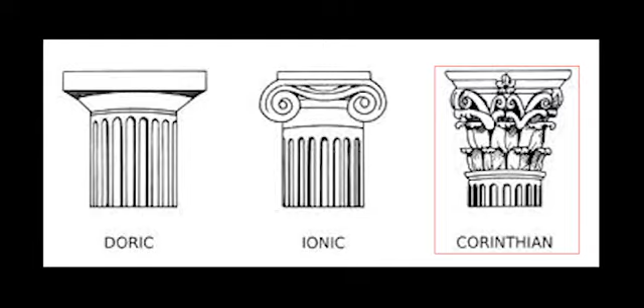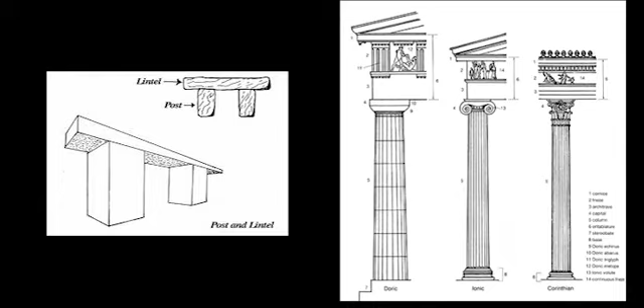You can see that the columns and facades of the buildings were inspired by the post and lintel system developed in the prehistoric time. The Parthenon, designed by Ictinos and Callicrates, was a very influential design during the Greek design period. The Parthenon in Athens stands on a raised outcrop called the Acropolis in Athens. Phidias was responsible for the sculptural elements of the building.

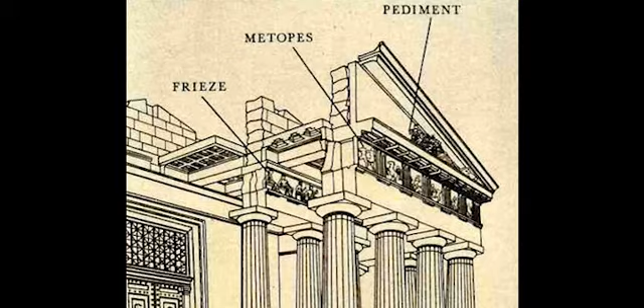The Parthenon is a temple of the Doric order with 8 columns at the facade and 17 columns at the flanks, conforming to the established ratio of 9:4, the golden ratio. This ratio governed the vertical and horizontal proportions of the temple as well as many other relationships of the building, like the spacing between the columns and the height. The golden ratio is considered the most proportionally appealing rectangle, and the ratio can be found in nature, like in the spiral shape of a shell.

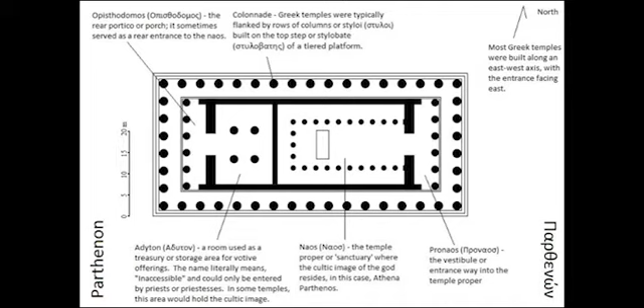The Parthenon is made from marble and is divided into 2 sections, one housing the cult statue of Athena, the patron goddess of Athens, and the other the treasury. There are 46 Doric columns on the outside of the building. Its massive foundations were made of limestone, and the columns were made of Pentelic marble, a material that was utilized for the first time. The question is, how does Greek architecture benefit society?

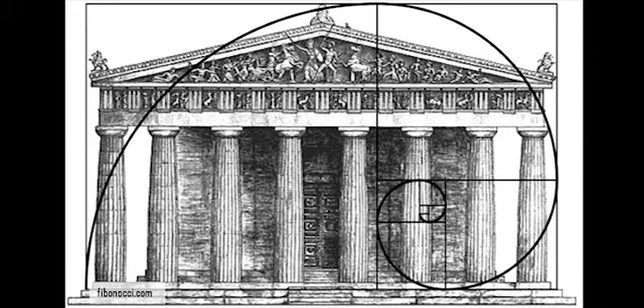The Greeks were the first to work with perfect proportions like the golden ratio, which benefited society with perfectly constructed architectural structures. The Greeks developed the decorative element of the post and lintel system through their classical orders. Society benefited from it in an aesthetic way. The Greeks started using marble in their architecture. Marble was a new building material that now could be used.

The Roman period. As the Roman Empire grew, so did the cities within, and as a result, engineering and design became important disciplines. Moving water hundreds of kilometers, roads, sanitation and sewers all represent Roman ingenuity. Roman structures like the Colosseum, Pantheon, triumphal arches, amphitheatres, aqueducts and bathing complexes were physical representations of the superior Roman design and construction style.

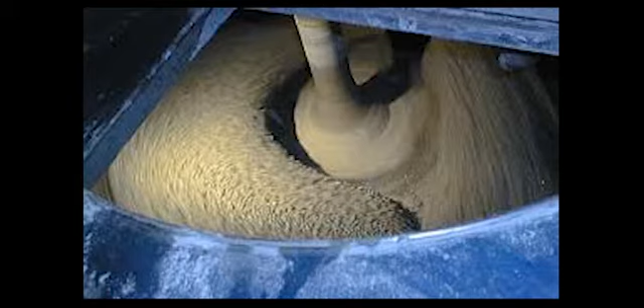The design characteristics associated with Roman design included functional, amalgamated, imperialistic strength, monumental arches in buildings, gigantic, decorative, imposing, and dominant designs, producing monumental structures through engineering. The discovery of concrete and the development of the use of arches in construction were just some of the inventions from the Roman Empire.

Panel paintings were produced in tempera, a painting medium consisting of colored pigment combined with a binding medium using egg yolk, and encaustic, which was burnt in. Mosaic paving in intricate geometric patterns decorated the plazas, and the people adorned themselves with cameos and metal jewelry. Coins were developed, which meant that the Roman Empire had a monetary system, and because of their quest to conquer, the evolution and improvement of armor and weapons also grew.

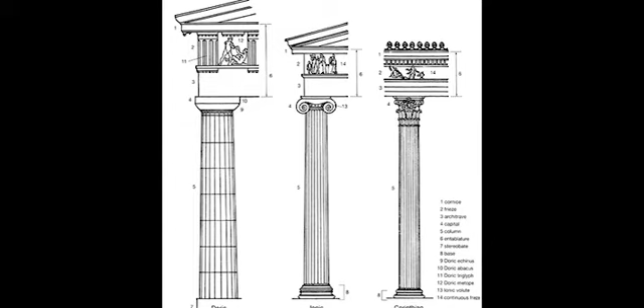The Roman style of design and architecture was based on examples of ancient Greece and masonry. Roman design was an evolution of previous styles and successfully combined new innovation and materials with existing design elements. As the Roman Empire conquered other civilizations, their visual style often influenced Roman design.

The amphitheater was the center of entertainment in Roman times. It was a place where Roman citizens went to watch fights between gladiators and wild animals, such as bears and lions. The bloodier the battle, the more the crowd roared. The fighters were slaves or criminals whose punishment was to risk a most gruesome death. The largest amphitheater in the empire was the Colosseum.

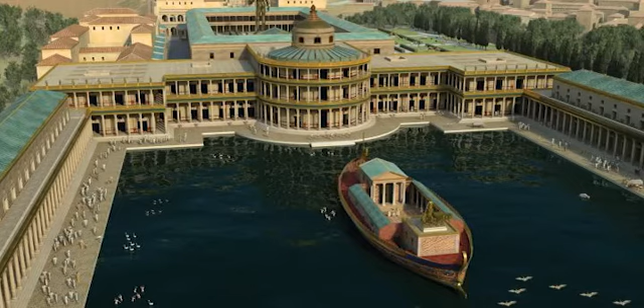When Emperor Vespasian became the new Roman Emperor in 69 AD, he wanted everyone to know that he cared about the people and was going to take care of them and not live luxuriously like Nero had. He tore down a lot of Nero's Golden House and made the land into a public park.

He also used his share of the gold from the looting after the first Jewish revolt to pay for the construction of a new amphitheater where the Golden House had been. Because Vespasian's architects used the new method of building in concrete, he was able to build quickly and cheaply. We call the amphitheater the Colosseum after the giant statue of Nero that stood near it.

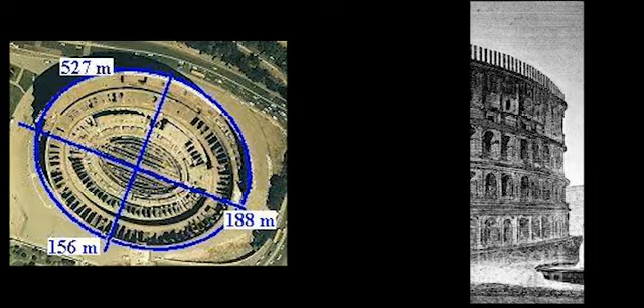Measuring some 620 by 513 feet, or 190 by 155 meters, the Colosseum was the largest amphitheater in the Roman world. Unlike many earlier amphitheaters, which had been dug into hillsides to provide adequate support, the Colosseum was a freestanding structure made of stone and concrete.

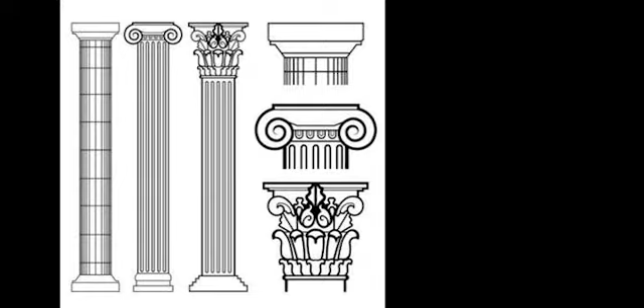The distinctive exterior had 3 stories of arched entrances, a total of around 80, supported by semicircular columns. This was a new development within architecture. Each story contained columns of a different order inspired by Greek architecture. At the bottom were columns of the relatively simple Doric order, followed by Ionic order, and topped by the ornate Corinthian order. This method of building showed the development not only of architecture but also of the Roman Empire.

Located just near the main entrance to the Colosseum was the Arch of Constantine, built in AD 315 in honor of Constantine's victory over Maxentius at Pont Milvius. The Romans were also responsible for the Pont du Gard Bridge. The Roman civilization was powerful and focused on expansion and development. Materials like concrete made it possible to build impressive structures.

As Roman cities grew and prospered, so the need for water and trade increased. Facilities in Roman cities and large towns were provided by the state. This included fresh water that often had to be transported over long distances via complex stone channels referred to as aqueducts. The water channel of an aqueduct was raised on a series of arches to ensure a downward flow of water from the source to the town.

The Pont du Gard Bridge and Aqueduct is actually only a section of the larger ancient Roman Nîmes Aqueduct in the south of France. The Nîmes Aqueduct runs over 50 kilometers through mountainous areas, moving water from natural springs at the River Gardon. The Pont du Gard Aqueduct Bridge is the highest Roman aqueduct bridge, almost 50 meters high, and dates to the 1st century.

The bridge has 3 tiers of arches which decrease in size from bottom to top. The precision of construction shows the high standard of Roman engineering. Today, the Pont du Gard is a World Heritage Site.

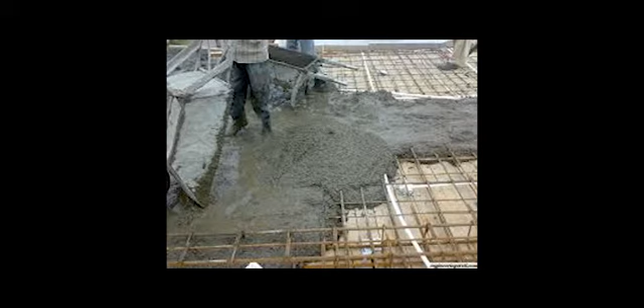Another example of Roman architecture is the Pantheon, known as the Temple of All Gods, completed in Rome in 125 AD. The domed style of the temple is characteristic of Roman building styles. The main dome temple is fronted by a portico, a porch with columns, which has 8 Corinthian columns. The dome rests on walls almost 5 meters thick and is constructed from poured concrete. The creation and weight displacement of the dome are engineered wonders.

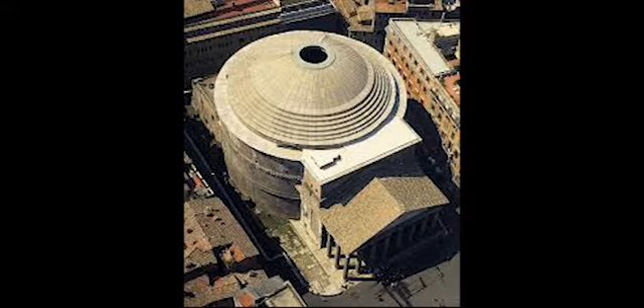The interior of the dome has recessed square patterns which lighten the weight and add a decorative element. In the center of the dome is an opening known as the oculus, a light source. This opening provides light into the temple. Along the walls of the interior are recesses called niches, shallow recesses which house the planetary gods. From the innovative light source to the ingenious drainage system within the temple, the Pantheon represents the incredible skill of Roman engineers, architects, and builders.

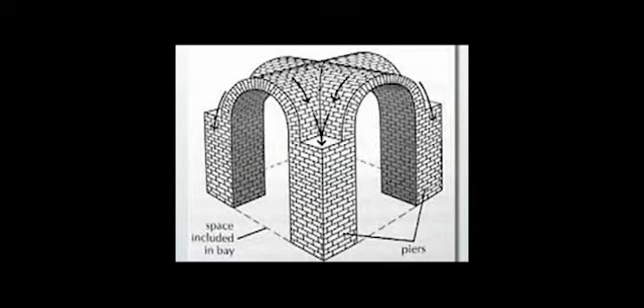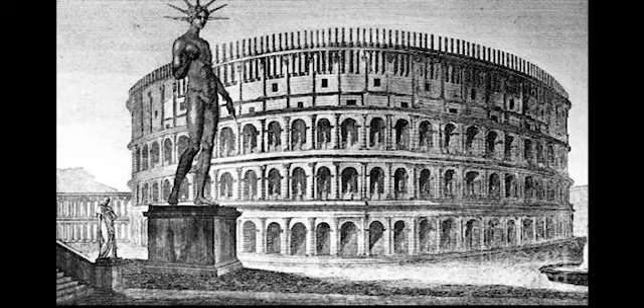So how does Roman architecture benefit society? Romans were known for their city planning. They created the first aqueducts for moving water. They developed concrete and poured concrete. They developed arches, stacking columns, dome-style temples, and drainage systems. They also developed panel painting and mosaic for decoration, and the first coins, which meant the Roman Empire had a monetary system.

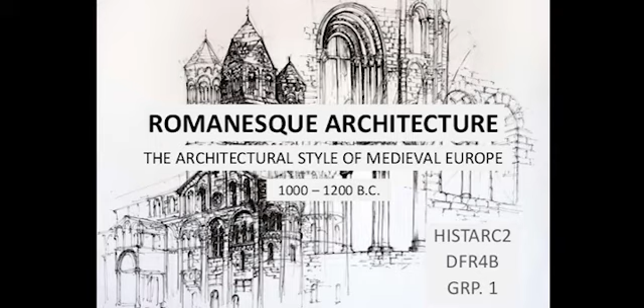The Romanesque period. Romanesque architecture is an architectural style of medieval Europe characterized by semicircular arches. It was characterized by a new massiveness of scale, expressing the increasing stability of the age and the re-emergence of European culture after 4 centuries of the Dark Ages. Despite a reduction in tension, however, a certain amount of uncertainty remained during the period 800 to 950, which was why Romanesque designs often doubled up as defensive structures.

When Charlemagne was crowned Holy Roman Emperor in 800 CE, Europe began to take its first steps out of the Dark Ages since the fall of Rome in the 5th century. The remains of Roman civilization were seen all over the continent, and legends of the great empire would have been passed down through generations. So when Charlemagne wanted to unite his empire and validate his reign, he began building churches in the Roman style, particularly the style of Christian Rome in the days of Constantine, the first Christian Roman emperor.

After a gap of around 200 years, with no large building projects, the architects of Charlemagne's day looked to the arched and arcaded system seen in Christian Roman edifices as a model. It is a logical system of stresses and buttressing, which was fairly easily engineered for large structures, and it began to be used in gateways, chapels, and churches in Europe.

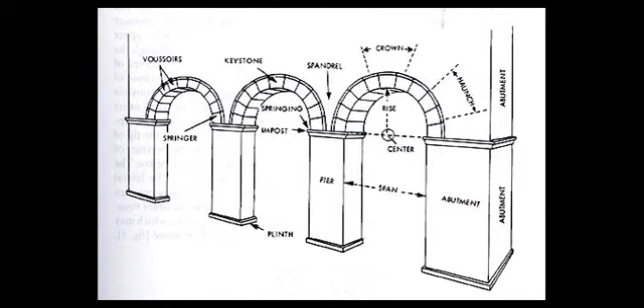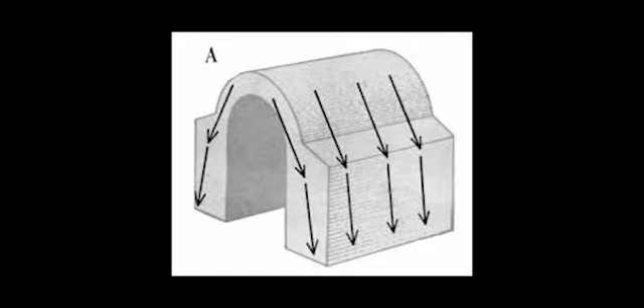There are different developments that happened during the Romanesque period. Semicircular arches. Most arches were semicircular, although a few buildings had pointed arches. Narrow windows or doors might be topped by a stone lintel, and large openings were nearly always arched. They made use of massively thick walls. These massive supporting walls had few and comparatively small openings, and almost eliminated the need for buttressing.

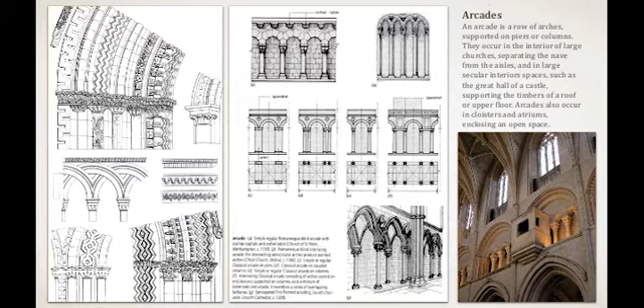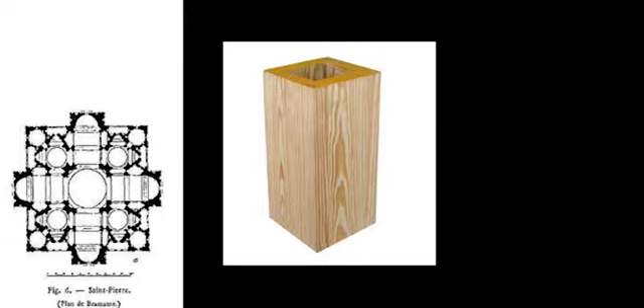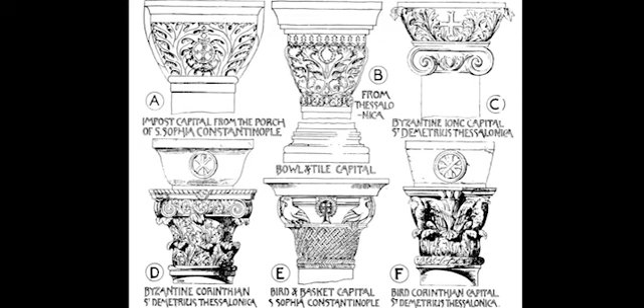Arcades. These were a particularly popular feature. An arcade consists of a row of arches supported by either columns or piers. Columns were either drum columns, if small, or hollow core, if large. Piers were typically built out of masonry and were either square or rectangular. Capitals on columns were usually of the foliate Corinthian style.

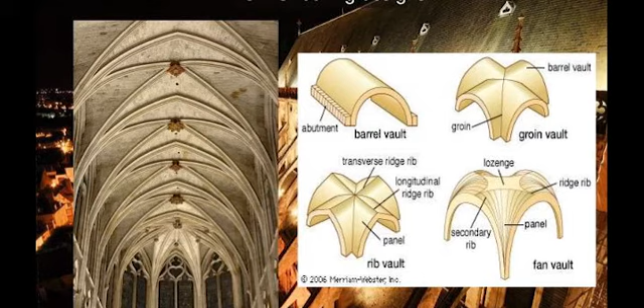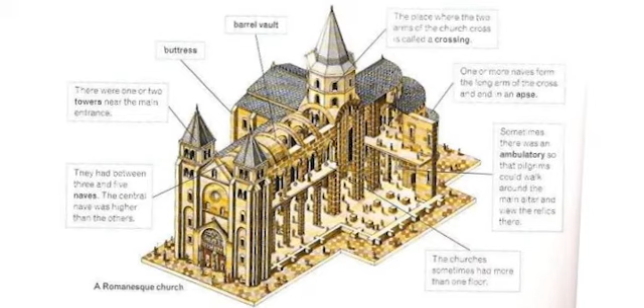Roofs. These were made from wood and then stone. Vaulted roofs generally featured barrel vaults and groin vaults made of stone or brick. Eventually these evolved into the pointed ribbed arch used in Gothic architecture. Towers. These were a regular feature of Romanesque churches. Types included square, circular, and octagonal towers. Saint-Sernin in Toulouse, France was designed by Bernard Gelduin. Saint-Sernin was built with a stone ceiling by the use of a semicircular vault with a timber roof loft.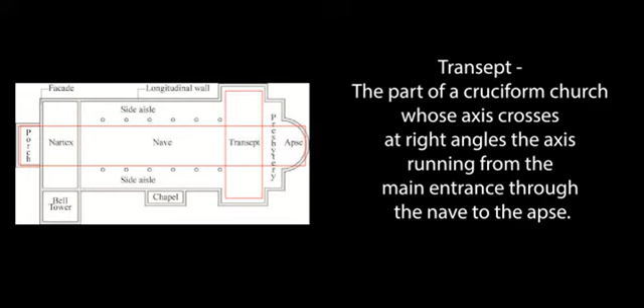Important terms to know when looking at different churches include the transept. The transept is the part of a cruciform church whose axis crosses at right angles the axis running from the main entrance through the nave to the apse. The nave. The nave is the part of a church between the main entrance and the choir, demarcated from aisles by piers or columns. An apse is a recess, usually singular and semicircular, in the wall at the east end of a Roman basilica or Christian church.

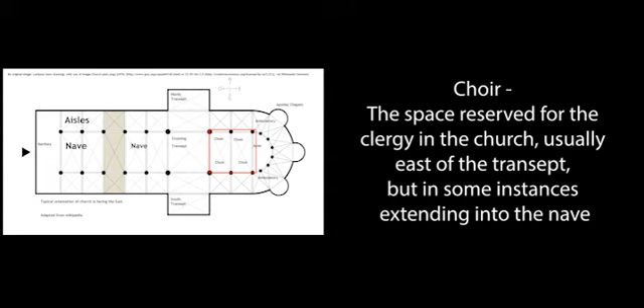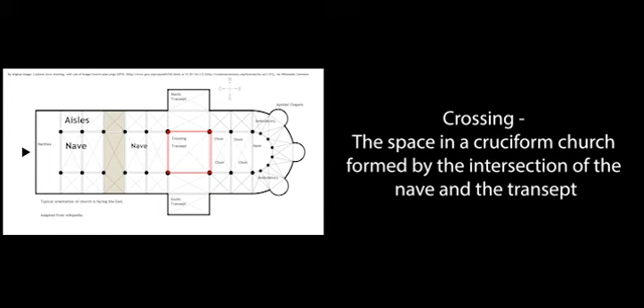The choir is the space reserved for the clergy in the church, usually east of the transept, but in some instances extending into the nave. The crossing is the space in a cruciform church formed by the intersection of the nave and the transept. The clerestory is the upper stage of the nave walls of a basilica or church, rising above the aisle roofs and pierced with windows.

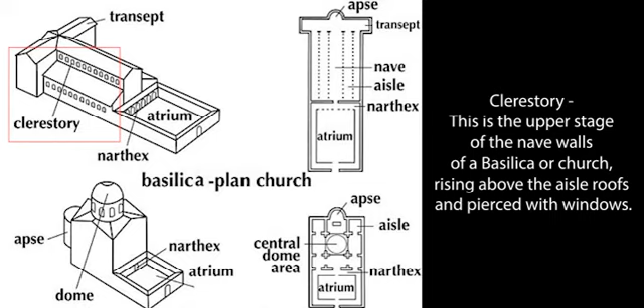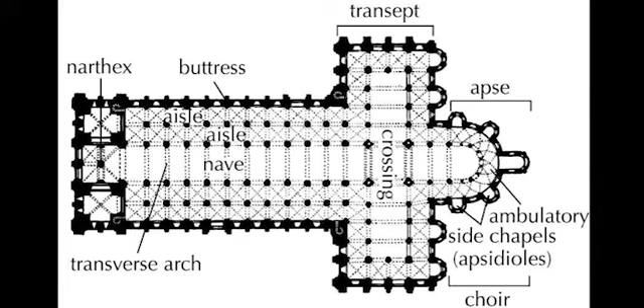The plan of Saint-Sernin is of extreme regularity and geometric precision. The crossing square, flanked by massive piers and marked off by heavy arches, has been used as the module for the entire body of the church. In the square plan, each nave bay measures exactly 1/2, and each square in the aisle 1/4 of a crossing square, and so on throughout the building.

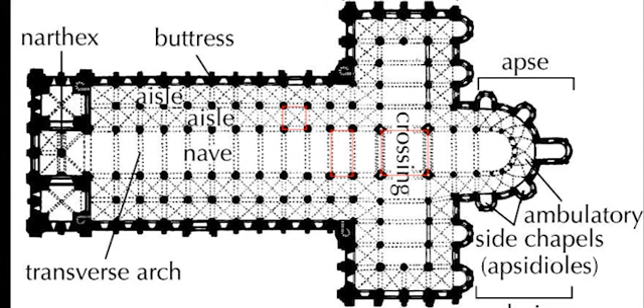The floor plan is also reflected in the nave walls, which are articulated by half columns that rise from the corners of each bay to the springing of the vault and are continued across the nave as transverse arches. The nave seems to be composed of numerous identical vertical volumes of space that have been placed one behind the other, continuing down the length of the building. This segmentation accentuates the geometric organization of the building plan and is also reflected in the exterior.

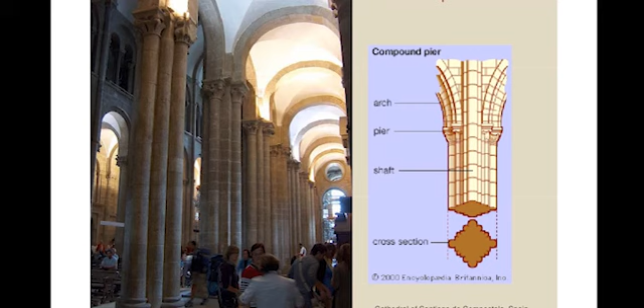The continuous cut stone barrel vault at St. Sernin put constant pressure along the entire length of the supporting masonry. Because of the great force exerted by the barrel vault, a clerestory window was impossible, and windows cut into the side of the vault would make it unstable. Therefore, light was very restricted.

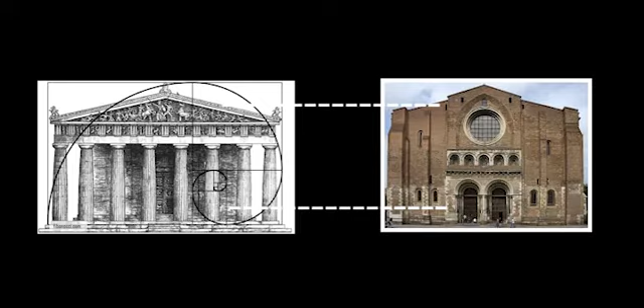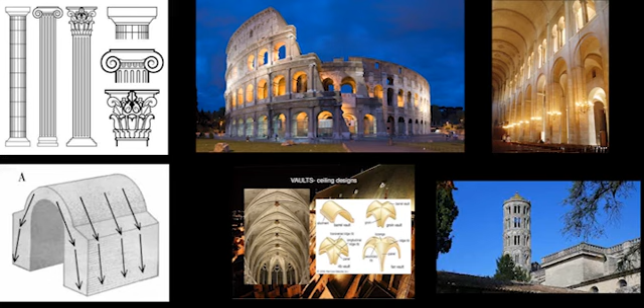How did Romanesque architecture benefit society? In Romanesque architecture, you can for the first time see historicism. Historicism is the incorporation of other civilizations or movements, styles, and elements into this movement. For example, Romanesque design incorporated Roman architectural elements. For the first time, we could see circular arches within basilicas and Christian churches.

They made use of thick walls for weight bearing. Arches included piers and columns and capitals. Roofs could be anything from barrel vaults, groin vaults, or pointed ribbed arch vaults. The Romanesque movement incorporated square, circular, or octagonal towers.